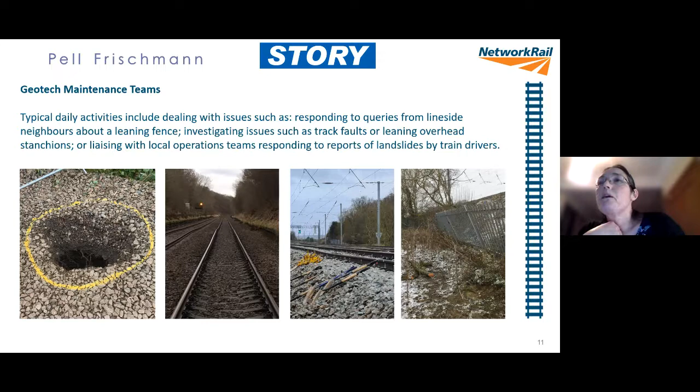So during adverse weather, there's 2 things that our team do in preparation for when we know we've got lots of rain coming. We've got a list of sites that we consider to be at risk when they get very wet, and we call those our adverse weather sites.

And we've got a tool on the Network Rail Weather Service platform, which gives us a red, amber, yellow and green alert level as to how wet each of those sites is and how much rain is forecast. As a team, we get email alerts each morning, and when one of those is red, or if it's orange as well, we'll look at it and send one of our contractors out to do things like clear ditches or culverts, check that everything looks okay. So they'll do that beforehand. We might send them out afterwards as well. So that's one thing again that the maintenance teams do - it's our day-to-day bread and butter kind of stuff.

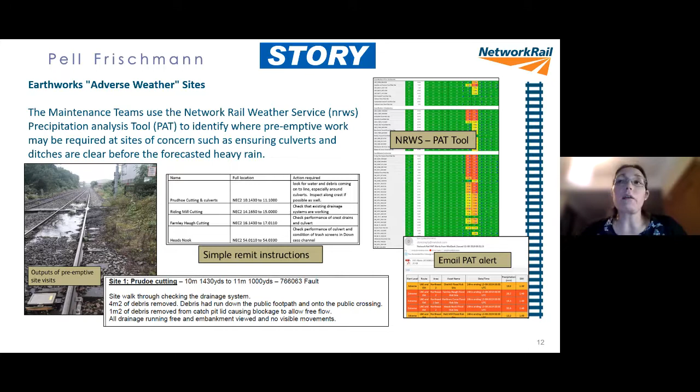So the next slide, please. This one is around convective rainfall. So when you get really, really heavy rainfall happening, very localized, what we've introduced in the past 12 months or so is using this convective analysis tool, or convective alerting tool.

So we've identified route sections - it might be 20 or 30 mile lengths of track - which have earthworks that we consider to be at risk. They may not be ones that would normally be at risk, but during very high rainfall events, these convective events, we're not sure where something might happen.

So what's been introduced is the control centre. When these high risk operational route sections have a forecast for one of these convective rainfall events, they'll put speed restrictions on until after the rainfall event has passed, and the trains that have gone through the section have indicated that there's no issues. So that's one of the other things that we do around heavy rainfall.

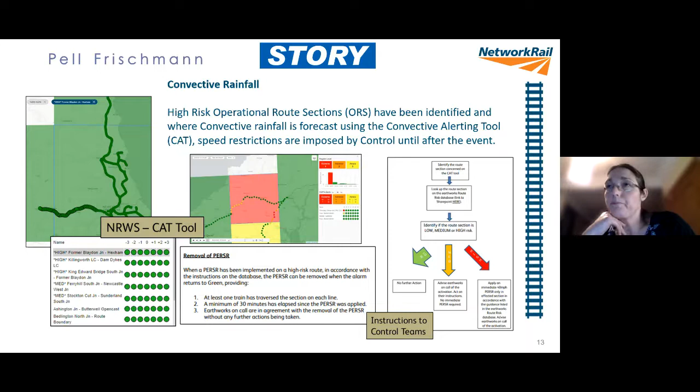And next slide, please. So this is just an example of something that's a bit over and above the day-to-day stuff that might happen, where you get told that a rock has fallen, or you've got a little bit of water coming down a cutting slope. So this is where we've got a proper landslip happening.

I think it did happen following quite heavy rain. You can see in the little sketch that the embankment has kind of dropped. In the photograph above, you should be able to make the track fault out. This was on the East Coast Mainline, and I think the milepost there, for those of you who may be interested, I think it's 66 miles.

Place is Connington Loop. The maintenance teams lead the recovery alongside our deliverers, the contractor, the designer, and the operational teams, and anybody else who may be part of the recovery. The sketch on the bottom right shows the sketch form of the repairs we'll do. At this site, for example, the incident happened and we shut the loop in August, and it took us a couple of months to get it recovered. That's a relatively normal kind of landslip that happens within an embankment or a cutting built for the railway. Next slide, please.

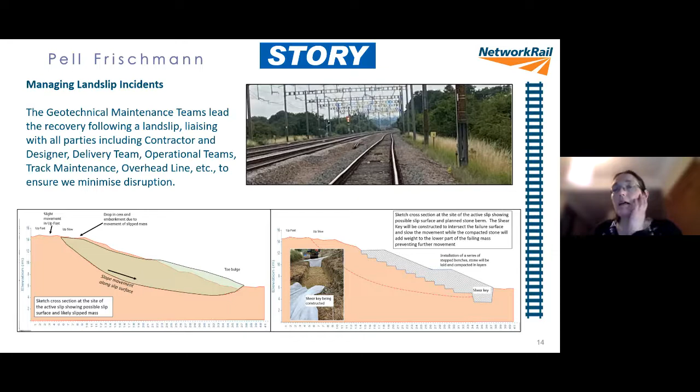We also look at large landslides - I'm using that term to denote hillsides, where you had landslips that would have happened whether or not the railway was there. This one is at a site we called Unstone. It happened in 2014, and hopefully my sketch helps. It's a big site about 100 meters from the red line near the track, where the troughing route was being pushed up, and the track was being pushed up, which you can see in the photograph on the right hand side. That's the toe of the landslip, and the back scar is about 5 meters, if I remember rightly.

When we looked into it, we found that there had been a historic failure there, and we had forgotten about it. It was in the files when we went digging for it, but we hadn't known about it at the time.

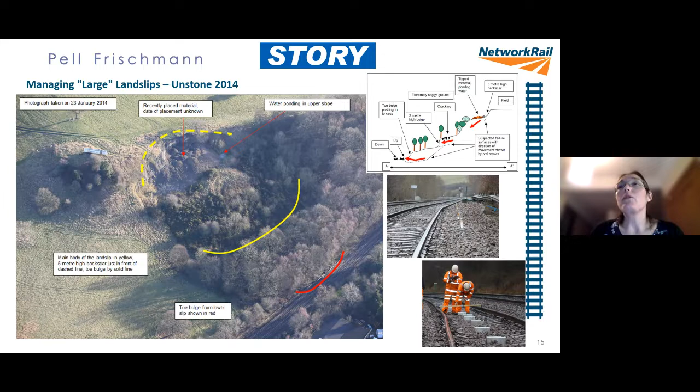If you go to the next slide, you can see how we repaired it. In the sketch, you can see we've put in what we refer to as a shear key at the toe, and at a few locations - I think there's 3 sets of shear keys - going further up the slope with quite deep drains draining the hillside. This particular incident happened after what felt like months and months of rain, so the groundwater levels were really high, and that was why this previous landslip, which had happened in the 70s and stopped moving, reactivated - we hadn't been aware of it. With the really high rainfall and high groundwater levels, it reactivated the landslip, which is why it happened again in 2014.

Okay, next slide, please.

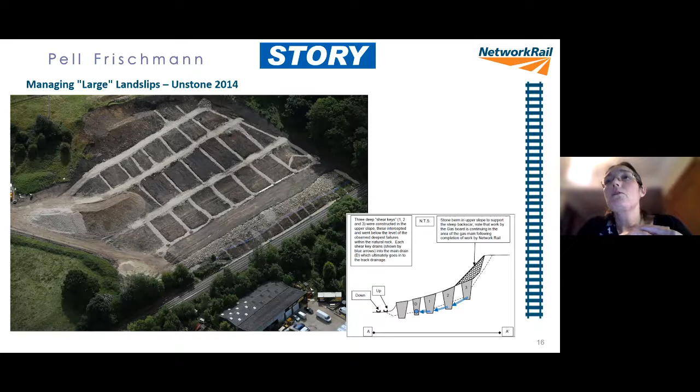This next site is at Golcar over near Slowett, or as I previously referred to it, Slaithwaite, and was laughed at. At Slowett, what we're looking at here is the top left-hand image - there's a track, and the track actually dips down, and it had been dipped down like that for years and years. There had been no indication of movement, though it did indicate that there was probably something going on. The ground - you can see the railway boundary fence there - falls down towards a canal, if I remember rightly.

In 2020, if everyone remembers the winter of '19-'20, just before lockdown, it was very, very wet - lots of flooding. This was one of the incidents that happened in that early period, I think February 2020, and it was first reported. In the top left-hand photo, you might be able to see some white in between the trees - that's actually a Yorkshire Water high-pressure pipe, doing like a fountain. We think that cracked because the landslide was reactivated again due to the very high groundwater levels. In the bottom photograph, you can see there's a crack in the path, and that's where the new movement was happening.

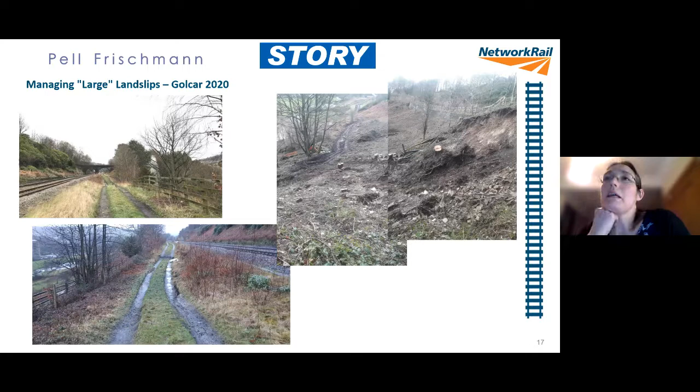So just to give you a sense of the scale - what happened at this site? I think there was an original historic landslide, a natural landslide. We built a railway on top of it, and it hadn't been moving much more. But then a secondary slip formed, and what we've done is put a series of piles through it. The key thing about this site is that it was very high groundwater levels that reactivated a historic slip.

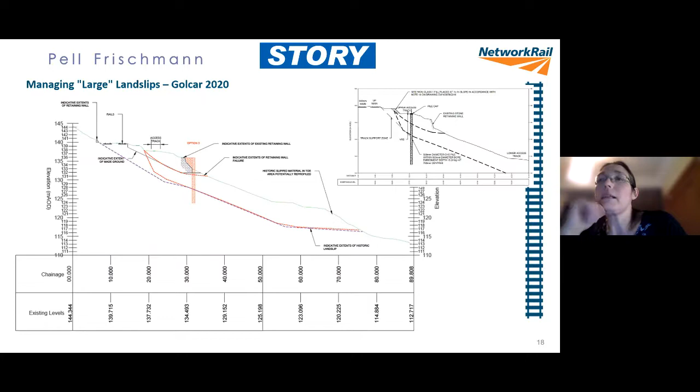So now we're into Morpeth, and I'm going through this pretty quickly. There's a history here. The line was constructed in the mid 1800s. They widened the embankment, then filled the ground on the uphill side, and blocked a culvert as far as we know. That was the first time they started recording reports of track faults. We suspect a connection between the two, but the records aren't very clear on that.

So they did do ground investigations, some monitoring, and installed some drainage in the mid 80s. And then again, it kind of got lost in the mists of time. In the 2000s, we started identifying more track problems, and carried out an assessment during the early 2010s. At that point, we thought the instability evident at track level was due to the rail embankment failing due to poor drainage.

So we installed a stone berm in 2015. It didn't fix the problem though. The track problems persisted, and then the OLE started giving problems.

We continued doing more monitoring and installed some inclinometers, and started recognizing that it was actually a much bigger slip than we had previously recognized. So at the moment, there's new OLE masts going in, which should all be installed sometime in March. We've done some temporary works, which you'll hear about shortly, and we're doing a big piling scheme. So that's kind of the essence of it.

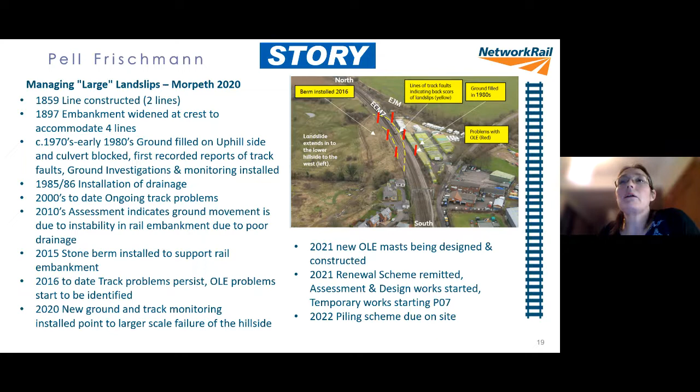So this is just showing you the layout of it. It's just north of Morpeth, and you can see the EJM line comes off on the east side.

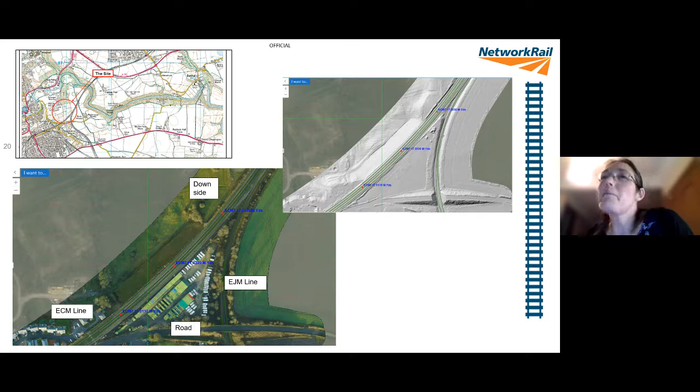So I've got a series of cross sections here, and I'm not going to go into these in detail. I want to show you our thought process and what we knew. We were reacting to this issue, attempting to help manage the track problems live, but also attempting to understand what was going on and what we needed to do to try and fix it. At the time we knew it was a deep slip, but we didn't know whether the slip surface was coming out halfway down the slope or much further along.

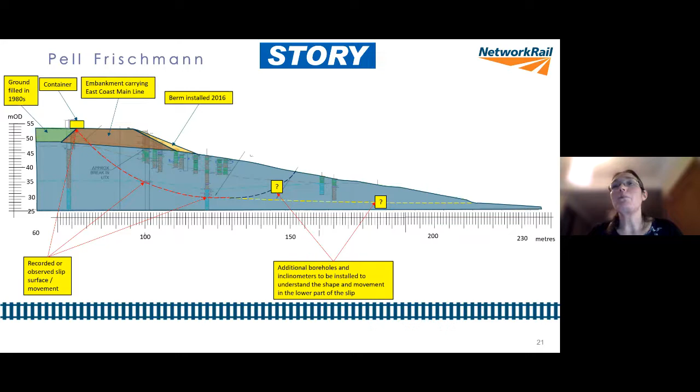On these cross sections you can see the little yellow triangle where we installed the berm in 2016 that didn't solve the problem. The additional boreholes in the lower slope confirmed that the slip extended the full height of the hillside.

Then we discovered that there was actually a secondary slip, shown in the darker red line there, that was actually affecting the embankment itself more than the hillside.

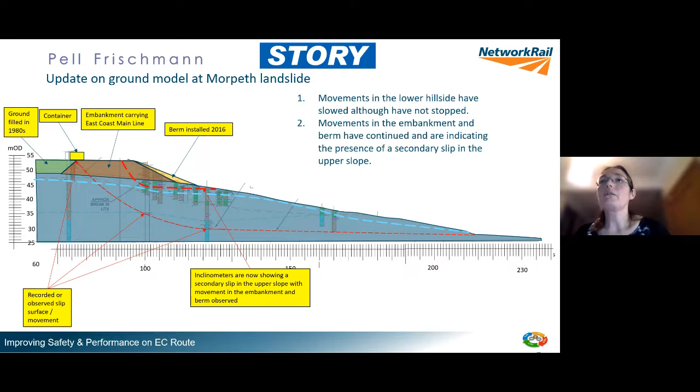This is again very sketch form, but the idea - we knew it was going to take more than 12 months to get the whole project done. So we thought we've got to do something to bring the water levels down and protect the railway during the winter months. You'll hear more about this from Nick, but we installed some incline drains to pull the water down, and steel piles towards the toe of the slope.

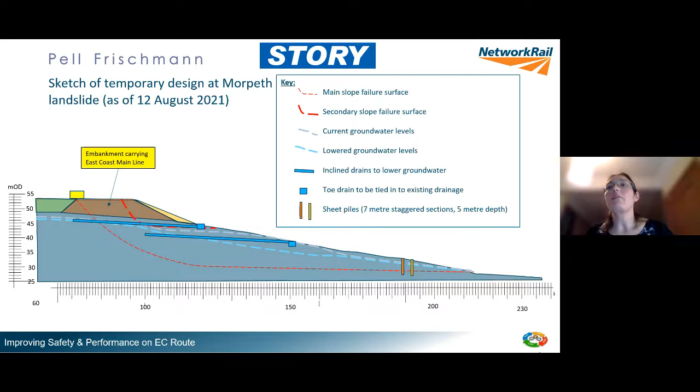This was, at the time, a number of months ago - the concept was that it was likely to be maybe three rows of deep piles as the permanent solution. That has changed now, but I'm sure Nick will guide us through the detail of that.

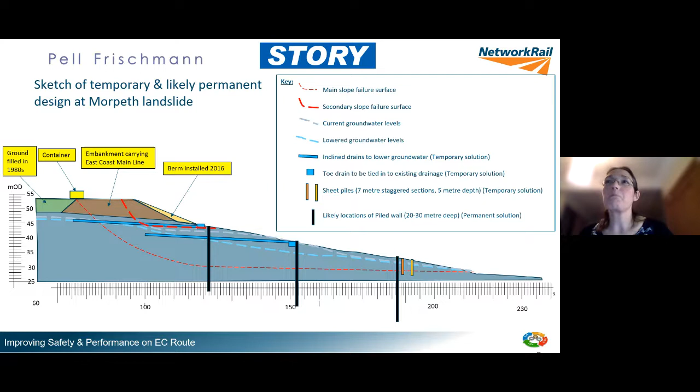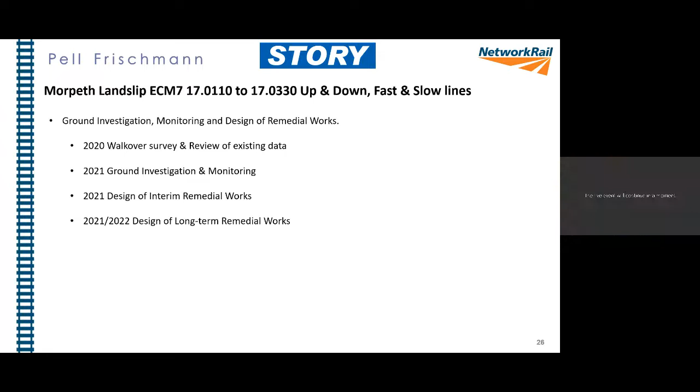I think you're up next, Nick. Right, thank you very much, Claire. Can you all hear me? Yeah, there I am. Right, thanks for that, Claire.

I'm on the next 20 minutes or so, hopefully not too much longer. Just going to look at the process that we've gone through as designers on the Morpeth scheme to investigate and monitor the landslide, and then the process that we followed to design the remedial works that Claire's just described, and as briefly as I can, describe the design and the philosophy behind that design.

So Pell Frischmann first became involved in the Morpeth scheme back in 2020 when Network Rail issued us with a remit to send a geotechnical specialist to site to carry out a site inspection and look for signs of instability of the ground that was causing track faults, and then to develop a monitoring plan to measure track movement and movement of the embankment side slope for a period, just to determine the causation.

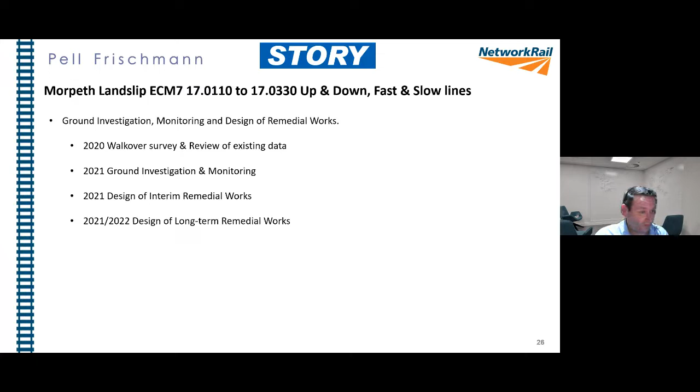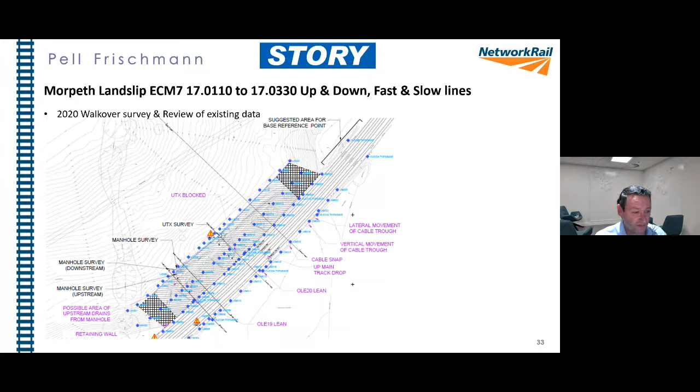So we set up this monitoring system in late spring 2020 and monitored it throughout the summer. I don't know if you remember the beginning of lockdown, but we had quite a glorious spring and summer, clear blue skies, very little rain. So this monitoring period didn't really record any significant ground movement, and everything seemed relatively stable throughout that period.

That changed in winter 2020, when the track faults were all reported again. And around this time, we started the ground investigation to investigate the influence of the ground movement on the hillside and embankment.

We carried out the ground investigation by installing a lot of inclinometers across the site. We had rows of inclinometers in 25 to 40 metre deep boreholes on the down-slope, another line of 25 metre deep boreholes along the embankment toe, a further one on the hillside, and then some shallow boreholes with inclinometers towards the toe of the hillside.

We also installed extensometers in the 6 foot, in the down-slope I think, just to check for any settlement of the embankment and the near surface soils, and also had piezometers in the container yard within 35 metre deep boreholes on the up-side of the tracks, just to determine how groundwater levels behind and under the hillside might influence movement of the tracks.

As part of the ground investigation, we also carried out a geomorphological survey of the site to check for any indications of ground movement, such as tension cracks, backscarps, breaks in slope, and groundwater seepages, among various other things.

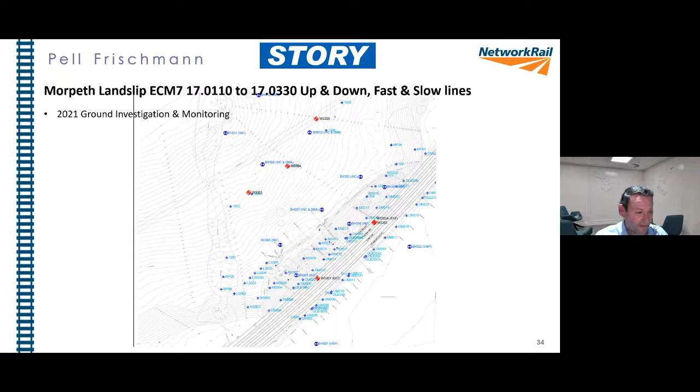What was more evident was the toe of the main landslide, interpreted as a very steep toe of the hillside just above the arable field, with lots of seepages and clearly disturbed ground. But quite surprisingly for a landslip of this magnitude, there were no clear tension cracks or shear surfaces actually observed at the surface during the survey, probably because the hillside was so wet at the time that such features were masked.

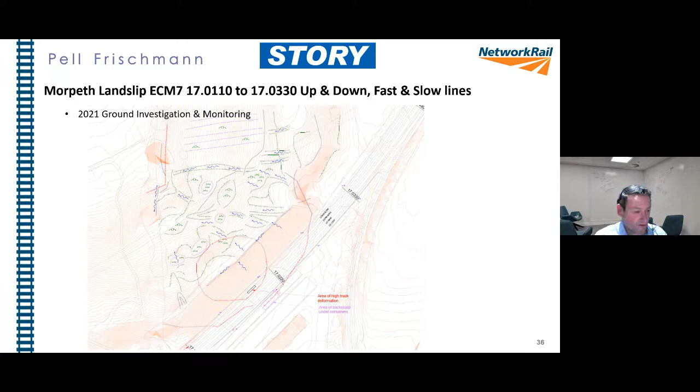Going through the natural geology first, like a lot of sites in northeast England, we tend to see a tripartite system of glacial soils: a glacial till, sand, and a laminated clay in sequence. On the Morpeth site, we have an upper glacial till layer, shown in green, underlain by a sequence of sand and silt deposit, then a laminated clay, shown in blue, which in turn is underlain by a lower glacial till, all sitting on top of the bedrock, which is Pennine lower coal measures.

Made ground across the site was limited to the container yard and the embankment itself, and the made ground thickness in the container yard increased from south to north, suggesting the original ground level had been infilled at some point in the past, presumably to level and regrade the container yard when it came into use, infilling the natural crest of the hillside right up to the crest of the railway embankment.

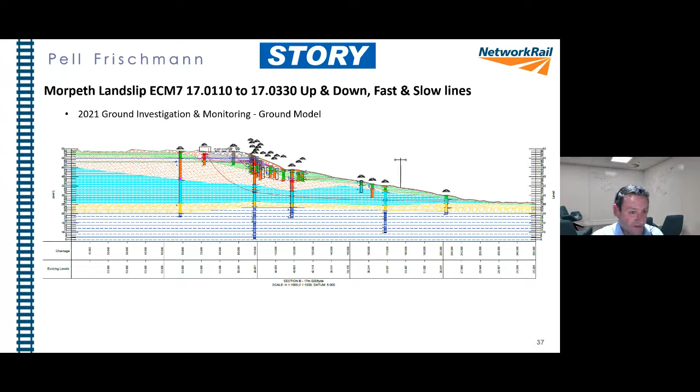This is a simplified sketch of the ground model, useful for looking at the groundwater levels on the site. What we found in the ground investigation was that groundwater levels were generally encountered at about 48 metres above ordnance datum, particularly within the sand and silt layer in the container yard upslope of the railway embankment. At the time of the ground investigation, when we first put the boreholes down in the container yard, we were seeing much higher levels, around 50 metres AOD, which we weren't entirely sure was due to water flush introduced into the boreholes, or reflective of a much higher groundwater table at the time of investigation, shortly after this adverse weather event.

We've got a relatively high piezometric head of 48 metres above ordnance datum in the container yard, and that explains the presence of numerous springs, seepages and boggy areas that we described in the geomorph survey around the embankment toe, the embankment slope, and the hillside itself. On all the drillers' logs for the boreholes excavated on the hillside, groundwater was generally between half a metre and a metre below ground level.

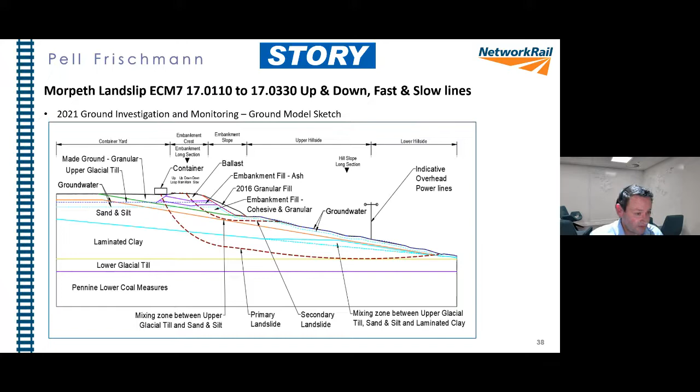We can also see from the inclinometer plots how movement reduced significantly from what we were seeing in February/March 2021, of around 1 millimetre a day, or 7 mil a week, following the adverse weather, to when we got the much drier period through late spring and early summer, when we were back to seeing less than 0.5 mil of movement a week — more or less just residual creep of the landslide rather than any active movement.

It's around this period where we're seeing little movement again that we began work on the design, and we expected movement to increase again with heavier prolonged rainfall events as we approached the end of the year and winter 21-22, where we are now. So this gave us a very short time frame to design, procure and construct a longer term remedial solution before significant movement resumed in winter 2021.

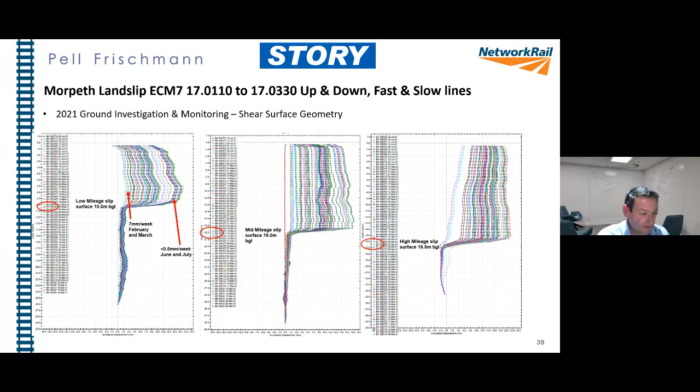Just to note, this was a short-term interim solution. It wasn't intended to provide long-term stability to Network Rail, Eurocodes or British standards. It was just there to improve stability such that the site would be better able to handle any increased rainfall events over this winter, while we designed, procured and installed the permanent solution.

The interim solution itself comprised a series of two rows of sub-horizontal drill drains installed into the lower hillside and into the toe of the embankment, and into the sand and silt layer. The purpose was to try and keep that characteristic groundwater level at around 48 metres above ordnance datum, making sure it didn't creep up to 50, which would be the point where we'd start seeing significant movement of the hillside and embankment again.

Together with the sub-horizontal drains, we installed a staggered sheet pile wall to intersect the basal shear surface of the primary landslip. To make sure we were getting the water off the site, we proposed improvements and repairs to the existing slope drainage and establishment of an outfall for that drainage. The sheet pile length and most suitable location were dictated by the need to provide a design that could be constructed quickly, using off-the-shelf materials.

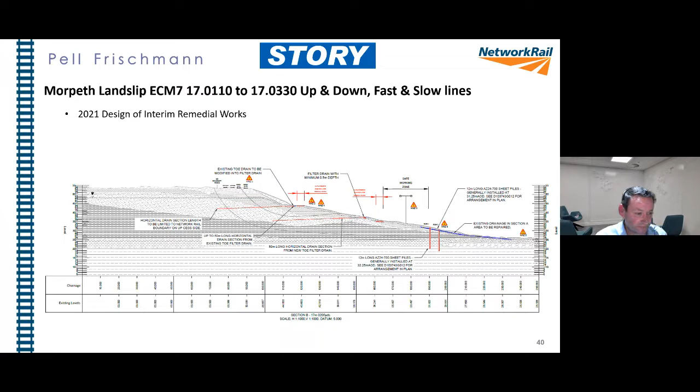If you can have the next slide, please. Another consideration for the sheet pile wall arrangement was that we needed to allow relatively free groundwater flow along the hydraulic gradient. So as you can see in plan view, we arranged the sheet pile rows in a staggered arrangement so that water would have the ability to flow straight off the site. Go on the next slide, please.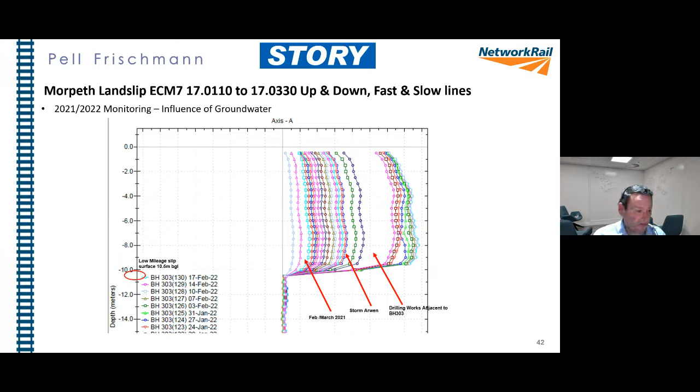And that kind of leads us on to the design of the long-term measures. So if I can have the next slide, please.

Various options were considered for long-term design. Although the interim measure of reducing pore-water pressures on the slip surfaces was considered the most cost-effective method of improving stability in the short term, given the size of the main failure, the high groundwater levels, the poor condition of the existing slope drainage, and the limited options for outfall of drainage onto what was obviously the river floodplain and a level toe, providing sufficient effective deep drainage across the unstable hillside for long-term stability wasn't really considered a viable option in isolation. Another requirement for any remedial solutions was to allow free flow of groundwater beneath the slope, and that discounts various other options such as a full-length sheet pile wall or a contiguous pile wall.

We also considered some of the more extreme options to improve stability, such as removing the destabilising upper part of the failure by removing the East Coast Mainline embankment and either replacing it with lightweight fill or sitting it on a piled slab or even constructing a viaduct across the site. But all of these were considered and quickly discounted because of the obvious disruption to rail operations and the rather excessive costs involved.

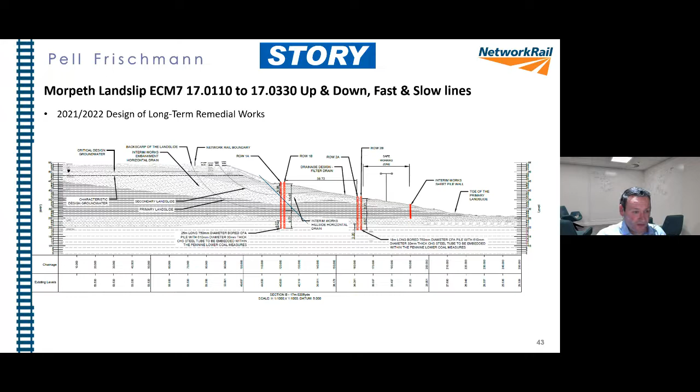So we've gone with the spaced pile system, and typically the spacing between piles on a slope is usually somewhere between 3 and 5 pile diameters. However, spacings in this case are largely a function of the structural capacity of the pile sections, the pile diameter, and limiting lateral deflection.

Because we're working on an unstable hillside with difficult access, we're limited to using smaller piling rigs and lifting equipment, simply because bringing in a conventional piling rig to sink a 110, 120 diameter pile simply isn't feasible on this site. And because we're using the smaller piling rigs, that limits our pile bore diameter and also the space within the pile to house sufficient reinforcement to accommodate the high bending and shear that are going to be seen by the piles.

Through some early contractor engagement, speaking to the piling contractor, we came to the conclusion that the largest pile bore we're going to be able to achieve on the site was going to be a 750 mil bore. So in order to accommodate the high bending and shear we're going to see, our only options for reinforcement were either circular hollow section steel tubes or universal column reinforcement. Again, buildability came into that, because talking to the contractor, pitching and welding universal columns that close to the railway line is always going to be a problem on an unstable hillside.

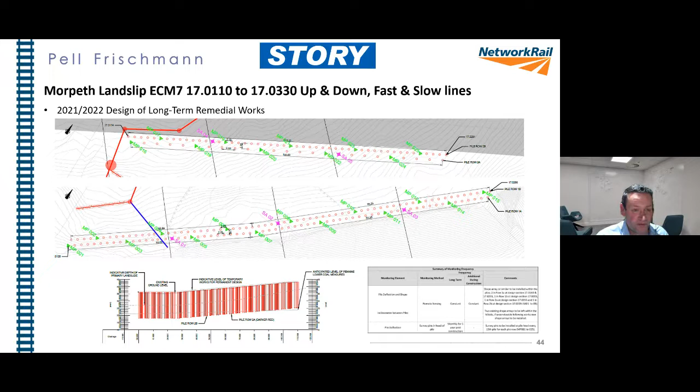I've probably rattled on long enough about the design now, so it's probably time for me to hand over to Ben, who's going to talk about the actual progress of the construction works on site and where we are now with the procurement of the long-term remedial works.

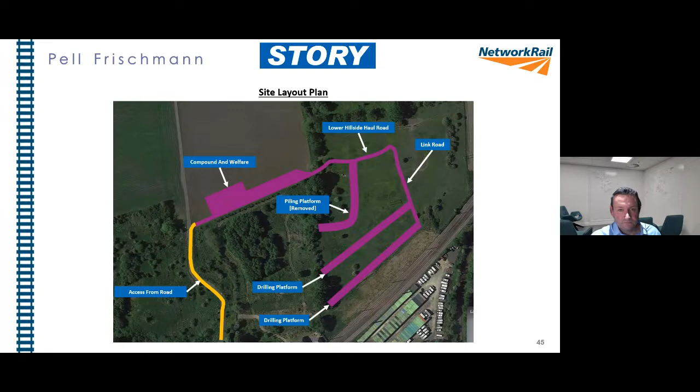The photo to the left better illustrates the scale of the hillside slope and the scale of the site. With the failure mechanisms at play, as Nick previously discussed, and with large items of plant such as the 55-ton leader rig or the 25-ton drilling rig working on top of an active earthwork failure, we were acutely aware that our construction works could potentially exacerbate the failure and movement in the hillside, which was even more pertinent as the railway was open to traffic throughout the duration of the scheme so far.

This meant we needed a collaborative approach to our temporary works designs, whereby we held regular forums with key primary stakeholders such as SPI, Keller, Pell Frischmann and Richter Associates. During these forums, the teams had an opportunity to discuss iterations of the designs, ensuring all stakeholders were provided an opportunity at regular intervals to give input and feedback. This helped ensure the temporary works designs were suitable for use by our supply chain partners, but also ensured we considered the impact the temporary works would have on the hillside.

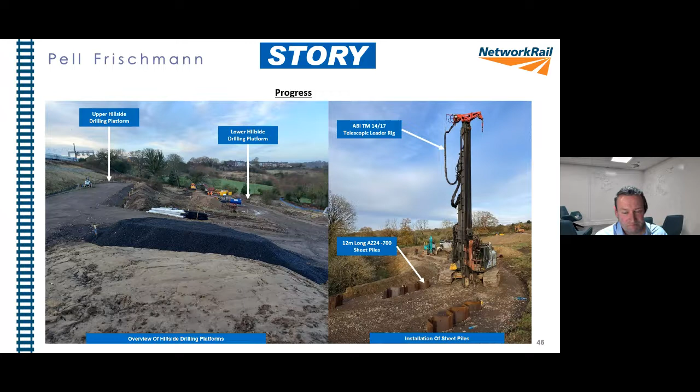Our cased lost point methodology involved drilling a 133mm diameter casing with the lost point drilling head directly into the hillside. Once the casing had achieved the design depth or a reasonable refusal depth, a smaller 63mm diameter perforated pipe was installed.

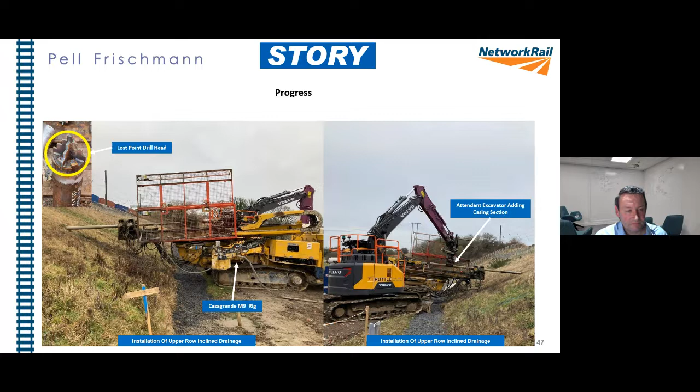As the project looks ahead to the delivery of the long-term solution, we have already procured over 4,000 linear metres of steel tube reinforcement, which have been identified by our piling supply chain partner, Keller.

The tube we have procured is existing CHS stock that's been repurposed from the offshore pipeline industry. Through the repurposing of this existing stock and steel, we've been able to reduce our costs to the client, reduce our material lead time risk, and also reduce our carbon footprint.

On the approach to the site, our vehicles need to navigate a level crossing, which is a sharp left-hand bend in the road that will prevent us from delivering the tube in single lengths.

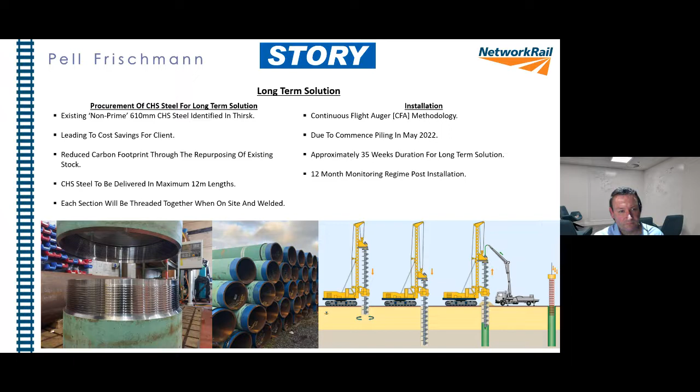We expect the construction programme for the long-term solution to be approximately 35 weeks, with piling due to commence from May, meaning that upon conclusion of both the interim and long-term interventions, we will have had a presence on site for well over a year in order to protect the railway from the large landslide at Morpeth.